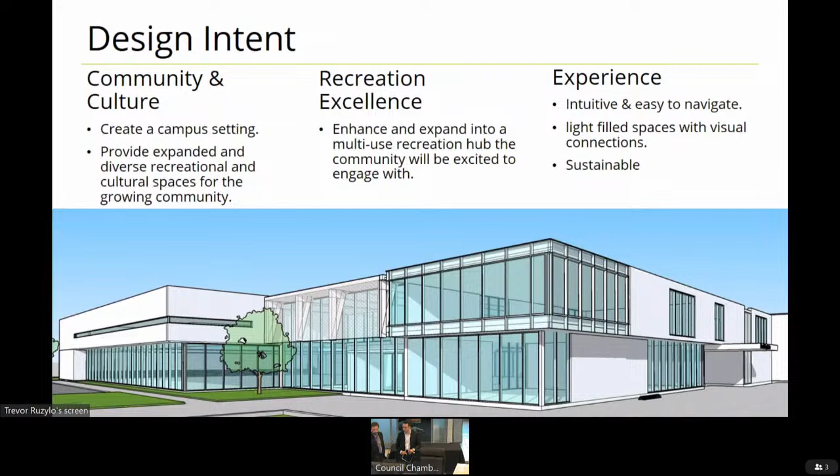We're putting in multi-purpose room spaces that can be used for various programming, both within the town and for renting out, so we have an eye on both town programming and operational profitability. We've also renovated an area for concession, with all new washrooms, and we're creating new fitness spaces to enhance the facility, overall creating a much bigger building.

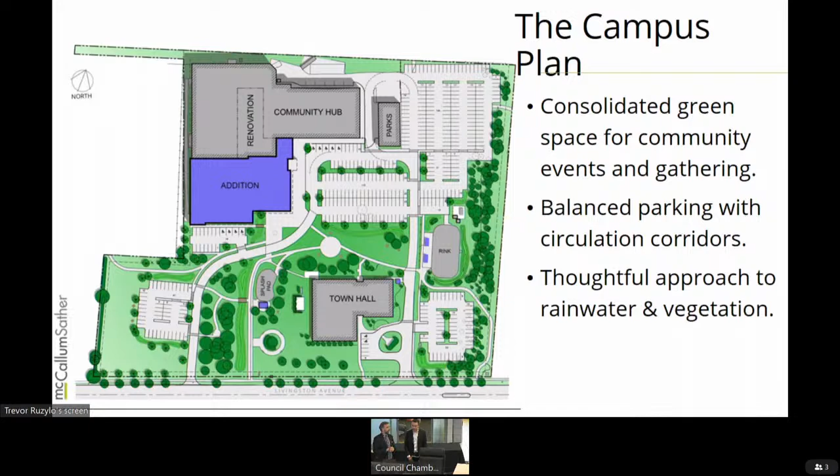Right now there's a lot of green over in the yard that some community groups are using, but we're looking to minimize that impact - no one really likes to look at a parking lot, but we can't always avoid them. So we went through a lot of different discussions about how we can add parking in a thoughtful way.

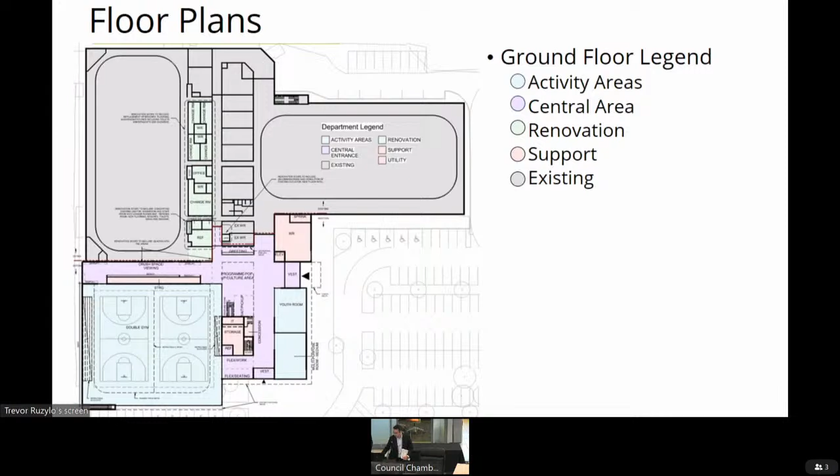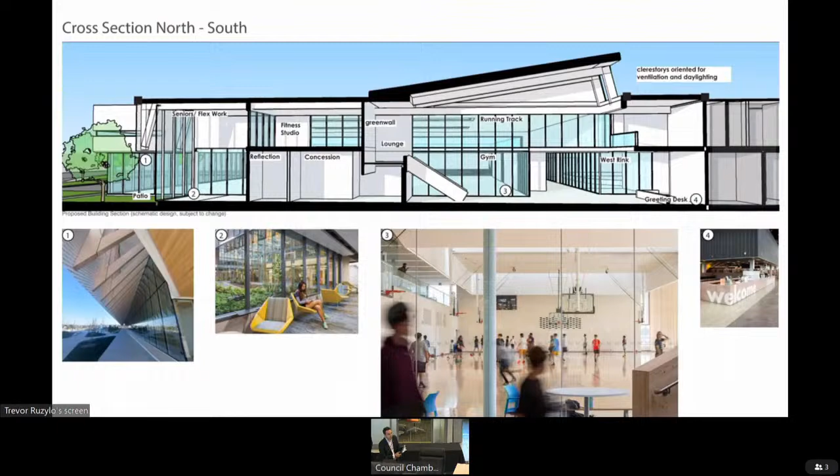And as mentioned before, the southward views and light towards the escarpment and the park areas.

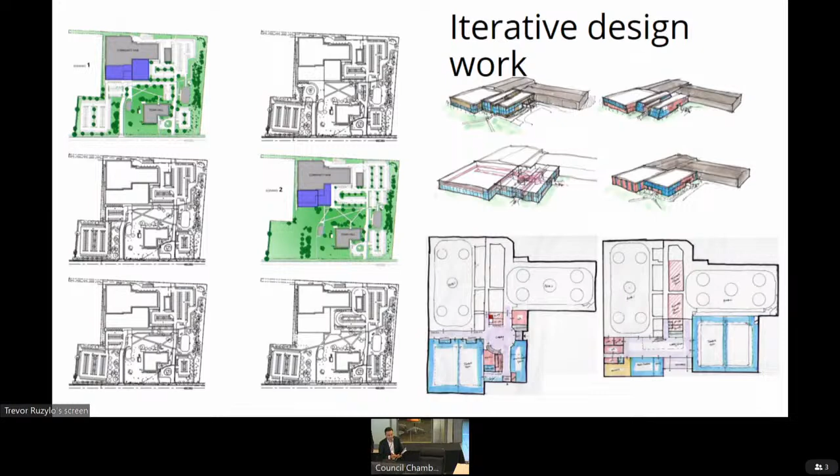And thank you, that's it. Great, thank you David and Adam.

As David mentioned at the end, this has been a long process coming to get to the design you're looking at today. It was not the first one that was put in front of us, and Sarah and I have been very demanding in getting what we've dubbed the unicorn building. I think where that really comes from is there's a lot at stake here as a big capital project for the town, and we really wanted to put forward something to council today that we really felt checked all the boxes. Kudos to McCallum Sather, because I think that they checked them all.

You want the site to be perfect, you want the interior space to be perfect. There's also, it's an expansion - you're not on a blank slate. You're trying to integrate all these new pieces into pieces that are already here. I think when you look at the design, they've done a really thoughtful job of making it feel like we haven't had to compromise. You walk in there and it feels like it was purpose-built, even though we're working with some of the pieces that are already there.

Before I jump into a few of the report items, I'm wondering if you could add a little bit about schematic design and how it relates to the total design process, what council will see next as we move through, just for clarity, and then I'll hop back up.

Sure, absolutely. Thanks, Trevor. So in the schematic design phase, that's really our first part where we're making the big moves. We're looking at what are the main spaces in the building, how they relate to each other, and looking at general proportions of the building, and then having some initial concepts about materiality that David went through, where things are solid, opaque, and potentially what those materials are.

In our next stage, we'll be looking more at the micro scale of individual rooms. So far you've seen some lines shown for the gym, so we can understand that it's sized appropriately for a double gym scenario. We'll be starting to look at individual rooms, like individual washroom layouts - how does that look in the size of space that we've allocated? How many yoga mats are going to fit in the fitness studio?

That's also when we'll be looking at our envelope design and setting up the main coordination items with the structural system - how deep is the structure going to be to make sure we got ceiling heights right? That's the next stage, in the design development phase. After that, you create the drawings, which takes a couple months, that actually go out for construction. Then you're into construction. We also have a construction manager joining our team, but we've got 5-6 months still going into design. This is a major step for the project, to show what the main steps are, the main moves and concepts that lead to where we go next as we're refining things going along.

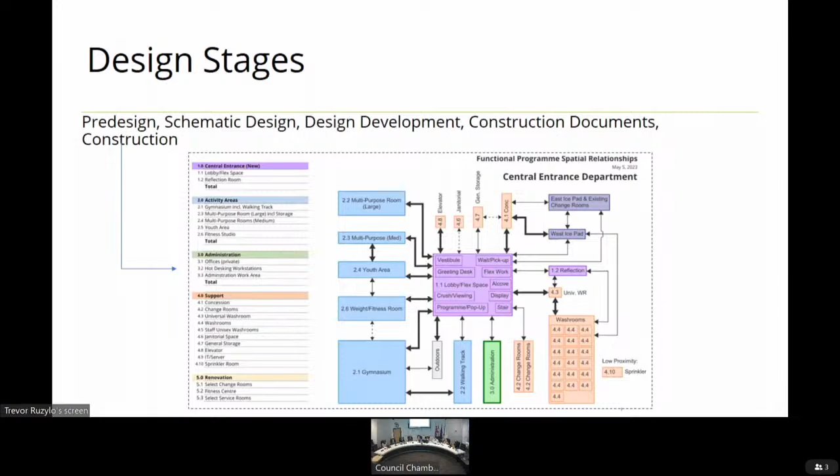Thank you, Chair. It'd probably be just a kind of a shotgun approach, gentlemen, as to questions that I haven't been able to glean out of the 140 pages that I just got yesterday morning. Thank you.

Anyways, functionality, roof. Tell me about the roof. I can't understand if there's a slope at all, or if it's a perfectly flat roof. And I'm trying to understand what type of insulation is going up into those ceilings. I'm talking specifically about the gym, because that's where the real roof component comes into play.

Also up there, you've got - and you have to help me out with the word for those things on the roof, clerestories, okay, it's a nice term. One of them, for instance, is right over the top of the gym. I don't know if you play basketball, but the worst thing you can do is get a shot of sunlight into your eyes as you're putting a shot up. That's number one, it's not friendly at all.

But also, that's one more thing up on a roof that's going to create maintenance requirements. To me it's just not functional, it's decorative and it becomes functional. And even the other one, you control the light. I understand trying to get the day lighting, but there's places for it to be, and I'm strong - my suggestion is that neither of those would even go up there.

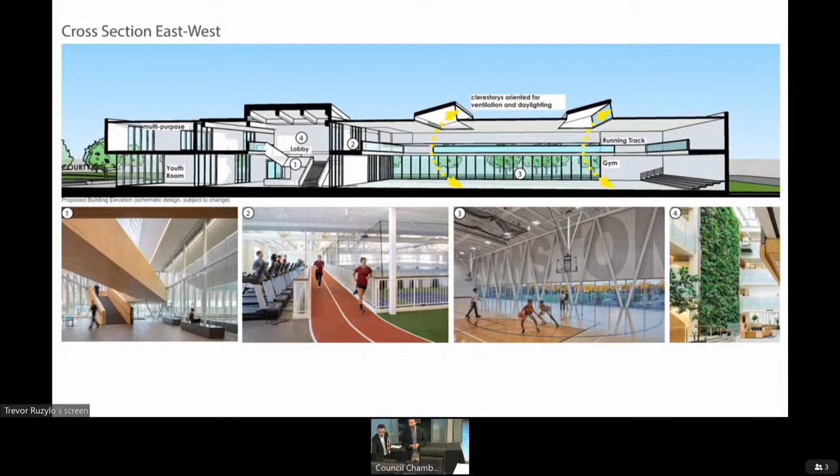Member Bennett, did you want to speak?

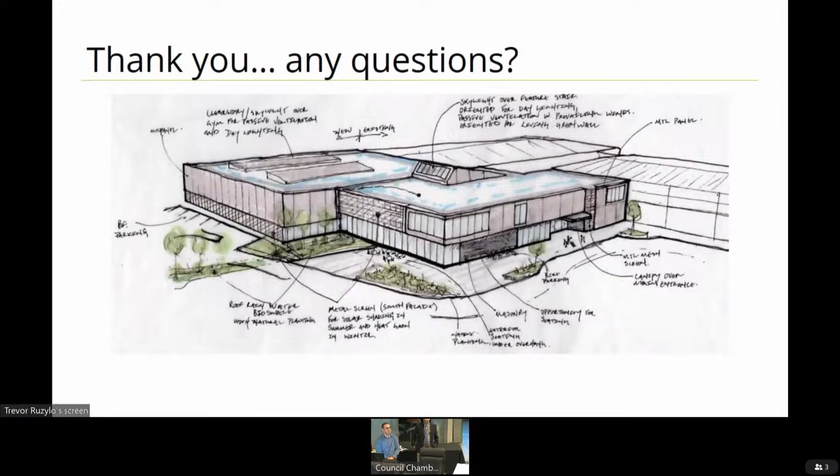Through the chair, on the second level there's a large multi-purpose room that's proposed. That would really take the place of our existing Peach King Center auditorium. Yeah, that would be great. It's on the southeast of the building facing south.

As I mentioned before, we will be moving the fitness center into the existing auditorium, which right now is kind of our main event space. But if you've been up there, and I'm sure everybody has, it's not the most inviting. So we're thinking with the new location, you're going to have windows, south facing.

We think that the opportunity to expand our rental profile, right now we do a lot of stag and dos, we host meetings. We think that with how nice the building is going to be and the way the industry is going, weddings is just an example of the type of facility thing that we could host.

You could have a banquet in there. I'm thinking civic recognition would be a great opportunity, public open houses. The whole ethos behind this is a functional multi-purpose space that can be used for a variety of purposes. I could see a wedding in there, you could do a stag and doe, you could have a public meeting, you could even run maybe a fitness class if we needed the space.

So it would have kitchen access and things like that, you mean? Like receptions or just a servery kind of thing?

From our experience with the Peach King Center auditorium, the need for a formal commercial kitchen with ventilation, like a range hood and an oven, is very limited. What we're seeing more and more is people needing a space to have food on site, a fridge, running water, but more of a space to serve. So it will be a kitchen, but I'd say more of a kitchenette type of thing, where if you want to bring a caterer in, they have places to stage, to store, but you're not cooking up the entire meal while you're there. The commercial kitchen we have in the existing auditorium upstairs is very rarely used for that purpose.

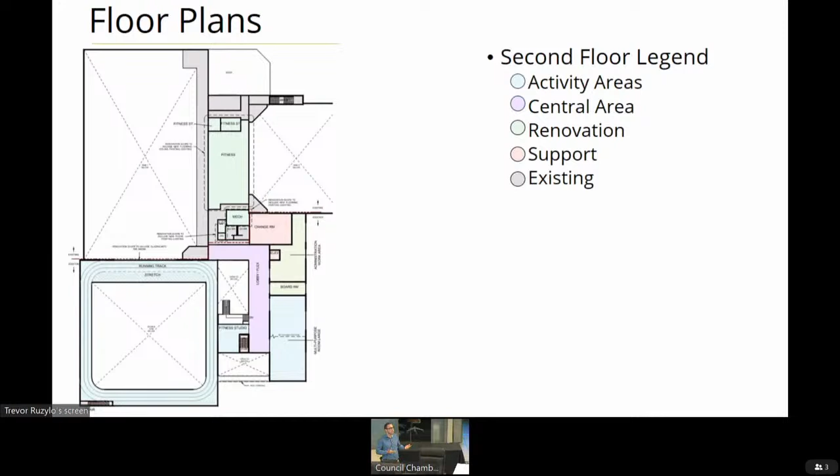So what we're proposing here is a film bylaw. This isn't the bylaw yet. We're proposing to make some quick tweaks to our policy so that we can keep managing for the short term, but to have a bylaw that basically says that the town of Grimsby has the ability to give the yes or no, regardless of the filming location, whether it's private property or public property. And that doesn't mean that the answer will primarily be no, but it gives us that mechanism to assess the location, assess the impact, so that we're not responding afterwards when we've got concerned residents.

So the one thing that we're just trying to be cautious of is to not swing the pendulum too far the other way, where we're going to kind of throttle filming either.

The degree to which a production comes and wants to film in Grimsby varies greatly. It could be an indie student film coming from Brock University. We're not looking to make a lot of revenue off that. Their impact is likely minimal. If they didn't ask for a permit, it's likely we wouldn't even know that they were there.

And then there's also the more typical arrangement, which is spillover from Hamilton — people filming in Hamilton find their way into Grimsby, not even knowing that they're really in Grimsby, and find their way to us. It's, 'Hey, we're based in Hamilton, we really like this shot in this local park, can we shoot?' That's probably the most typical arrangement we get in terms of requests for filming, and they are increasing.

Not in a way where I'm getting a call every single day, but just anecdotally, when I first started 6 or 7 years ago, I would get no phone calls. And now, once a month, especially in the filming season in the spring and summer, we do get the odd inquiry.

So the film bylaw would be one quick move we can do. Another quick fix that we're working on is just a film website page that addresses what our approach is to filming in Grimsby, along with an application form, just so that we're getting that opportunity to vet it before they make that phone call.

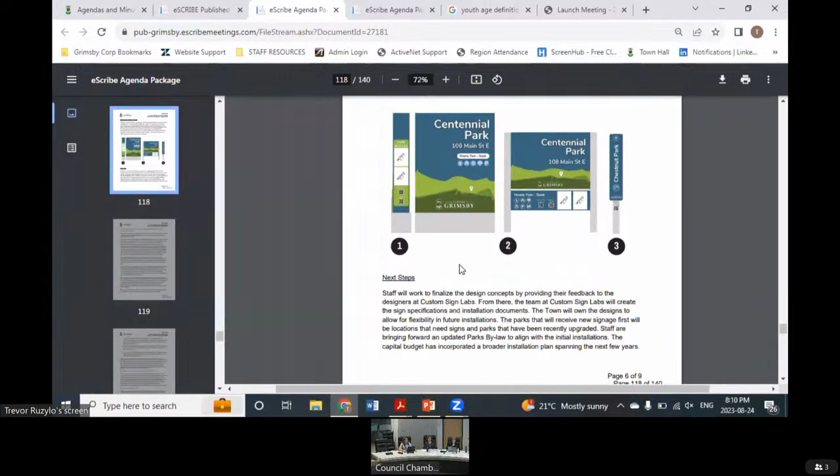As for the notices, that's something we'll keep flexible. If we're doing a blitz reminding people to keep their dog leashed, maybe it's that. In certain seasons it might be reminding people fireworks aren't permitted in parks, or no winter maintenance, or that a repair is being done. The intention is there's flexibility to post notices that are most relevant and current. No smoking in parks was something we often had, we don't tend to need that sign as much now, but if there's a current need to communicate something, we might use it in a versatile way.

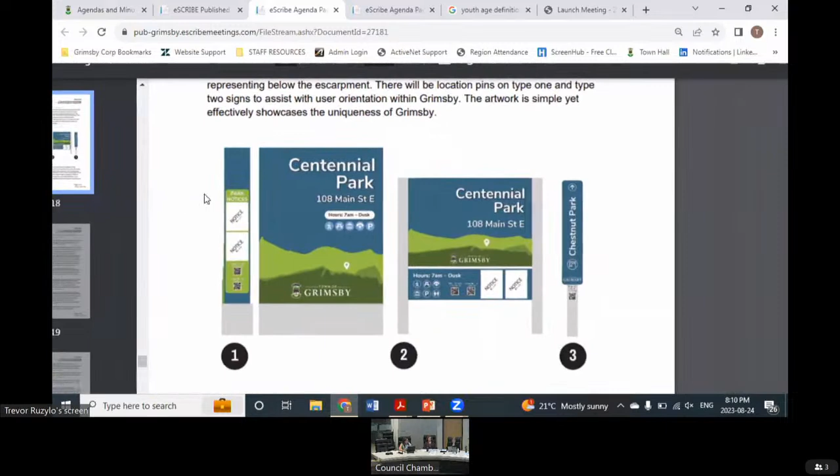That's great. Thank you, Sarah. Does anybody have any questions or comments?

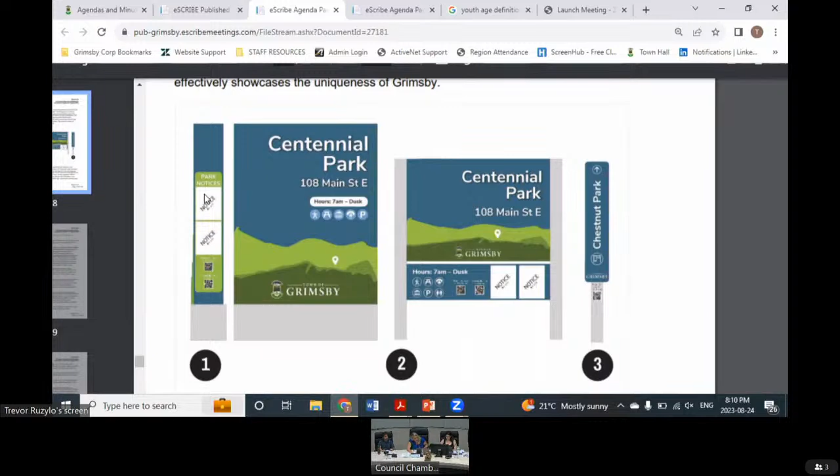No? Okay. Resolved that report DCS 2332, Community Services Department Information Update for August 2023, dated August 24, 2023, be received for information. All in favor? Okay, that is carried. Item 10, correspondence.

10.1 Niagara Region, provision of curbside collection on behalf of producers for residential blue box program.

Actually, I will ask Sarah if she could speak on this, because I know a few of us had questions how this came up when we thought it was possibly a Public Works item. So if you could address that, answer the question, and then we'll move on. Oh actually, no, okay, first we'll get the mover and seconder. Can I please get a mover and seconder to receive this correspondence? Okay, moved by Councillor Howe and seconded by Member Bennett.

Resolved that correspondence from Niagara Region, okay, and then Sarah, if you can maybe speak to that first, thank you.

So I believe the rationale for clerks adding it to this is it could have some facilities impact. What this program does is basically require the producers to manage their own recycling collection, and it wouldn't be done in the same way it currently is. So there is some facility impact depending on how that rolls out. If we're currently using a regional collection system, we'd have to do it differently. I can tell you we already are doing it differently in a number of our facilities, it's being collected in different ways, so it's not a significant impact.